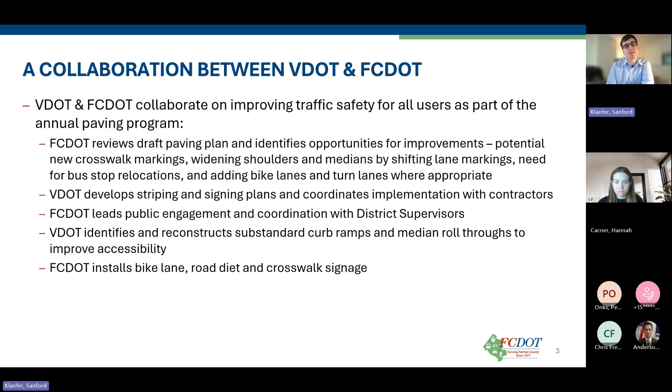So we're doing things a little bit differently this year than we've done in the past. Typically, we've held these public meetings about the proposed striping modifications in the spring, but this year we're going to be hosting those meetings in the fall instead, and that gives us and VDOT a little more time to design the new pavement markings. All of the roadways that we're going to be talking about tonight appear on VDOT's draft repaving list, but they won't finalize that list until this coming spring, and they will do the repaving next year.

So a couple of notes before I get into the proposed modifications. All of our proposed crosswalks are subject to VDOT approval. All roadways with proposed striping modifications appear on VDOT's draft repaving list. VDOT will publish their final repaving list in April 2026 and may choose to defer the repaving of any of these roads. For roadways that don't end up on the final repaving list for 2026, any proposed crosswalks or other marking changes will also be deferred until that road is repaved.

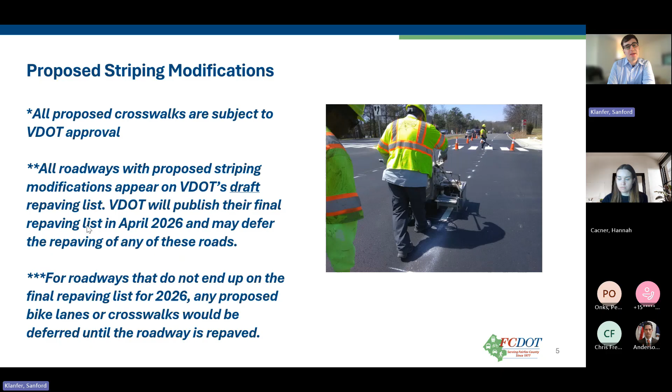So, as I mentioned, we're going to be talking about some crosswalk enhancements tonight. We, FCDOT, study pedestrian crossing locations without crosswalk markings to determine if the crossing meets VDOT warrants for marked crosswalks, and if minor parking restrictions are needed to improve the safety at those intersections. We also, as part of this, will sometimes have to upgrade existing curb ramps to meet ADA standards. And VDOT will upgrade existing crosswalk striping from standard to high visibility, like you can see in this photo here, near schools and near transit stations.

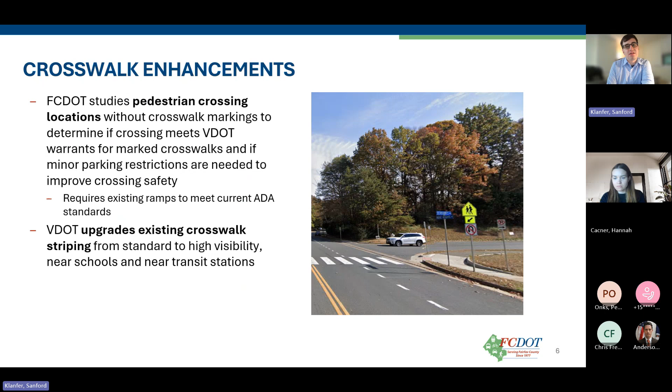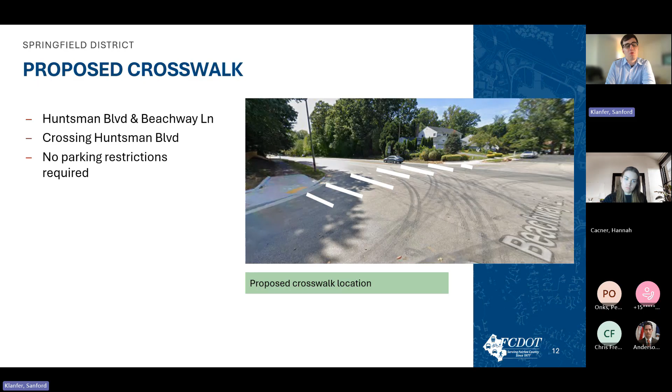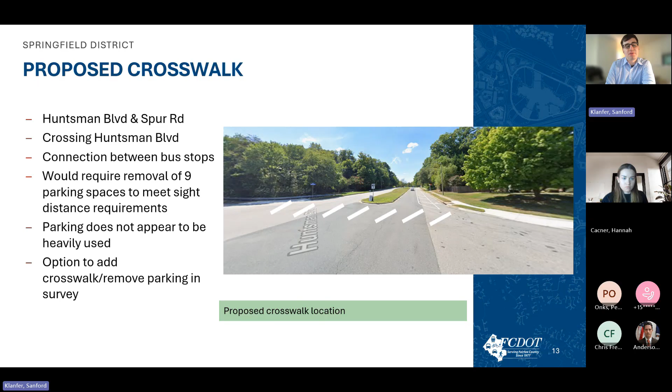Another proposed crosswalk crosses Huntsman Boulevard at Spur Road. This will provide a connection between bus stops and will require removal of 9 parking spaces for sight distance requirements. However, from our investigations, we've found that this parking does not appear to be heavily used.

This diagram shows where the parking would need to be removed for this crosswalk, once again shown in yellow.

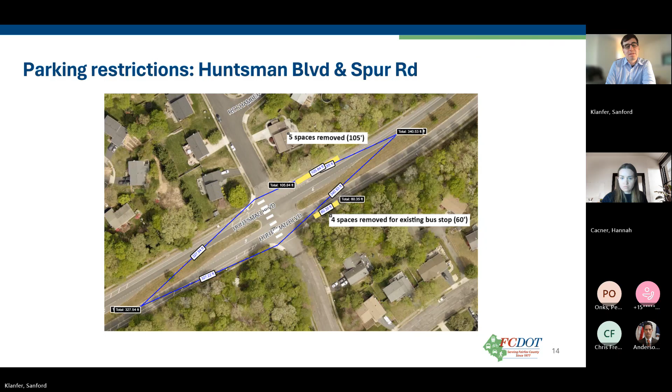This is a proposed crosswalk across Hampton Forest Way, where there is an existing trail crossing that does not have a marked crosswalk. This one has been requested by the local homeowners association, and will require removal of 16 parking spaces to meet sight distance requirements. Once again, here's an illustration of where those parking spaces would be removed.

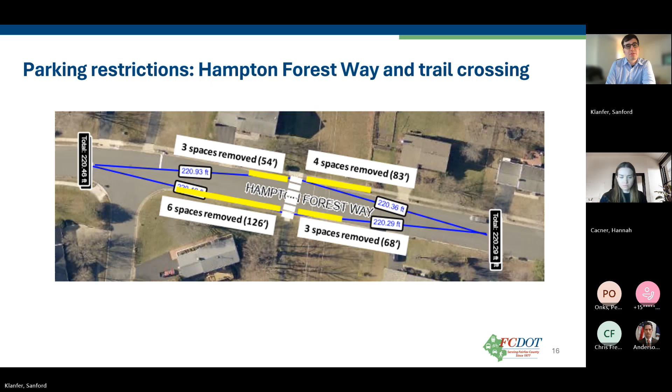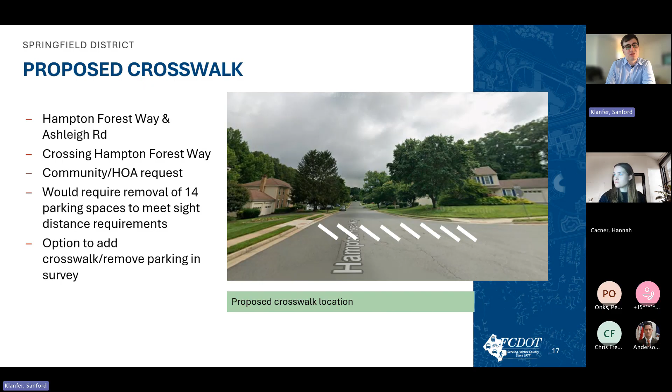This is another proposed crosswalk across Hampton Forest Way, at Ashleigh Road, also requested by the local homeowners association. This one will also require removal of 14 parking spaces for sight distance requirements. Once again, here's a diagram of where those spaces would be removed, shown in yellow.

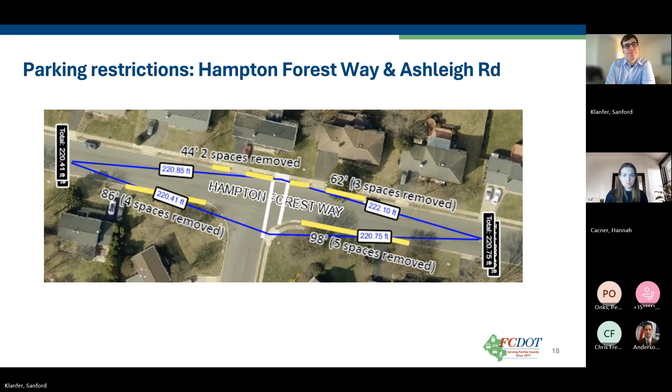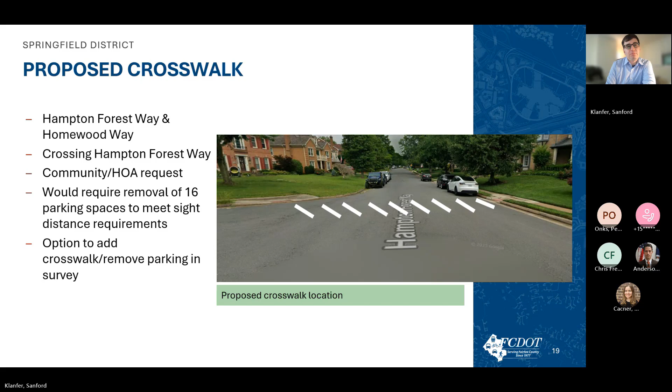This is another crosswalk proposed to cross Hampton Forest Way, this one at Homewood Way. This is also at the request of the local homeowners association, and would require the removal of 16 parking spaces for sight distance requirements. Once again, you can see in yellow where the parking would need to be removed in relation to the crosswalk.

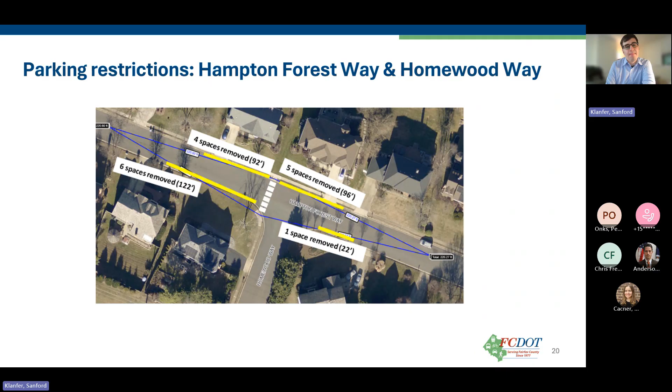As far as feedback is concerned, if you have comments related to pavement or road maintenance, which can be anything from drainage issues to missing signage to broken signals or walkways, that can be submitted to VDOT through their portal at my.vdot.virginia.gov.

If you would like to request a road repair, you can follow the 'I need a road repaired' link on that portal, or you can call 1-800-FOR-ROAD, that is 1-800-367-7623. And you can visit the project webpage for the Fairfax County Restriping Program at www.fairfaxcounty.gov/transportation/2026-paving-and-restriping-program. With that, I'll turn it back over to Hannah.

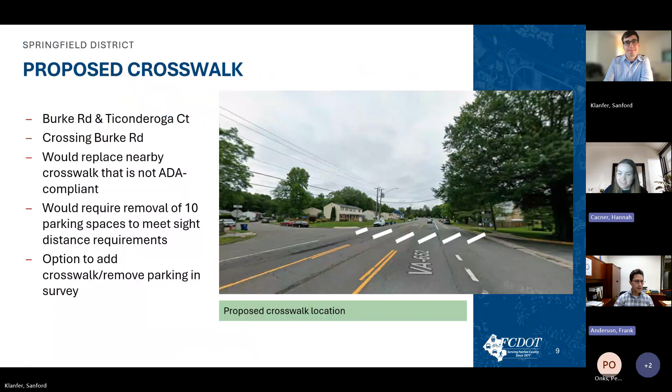Sorry, I went past it. There we go, just saw it there. Yes, thank you. That's the one that shows the parking spaces. Okay, good to know.

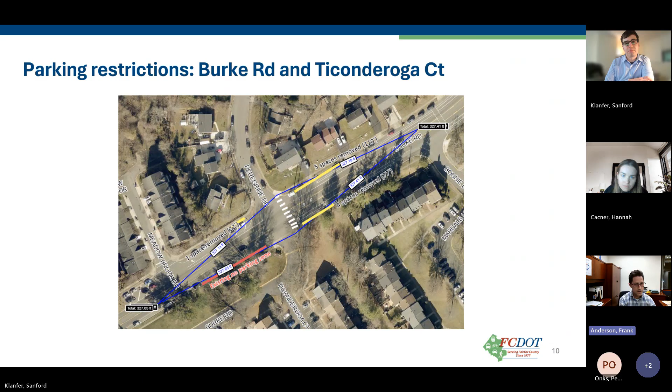So that's 4 spaces on the south side of the road, out of the 10. And at the Cara Place, can you go up to the parking slide for that one? Just 1 space being removed on the right side there. Okay, got it, thanks. Most of them are on the opposite side.

Yeah, I think these are important. That crosswalk that's there now is practically invisible. Just wondered if you all had taken into consideration the Burke Road realignment project that's underway, that's going to be around the bend.

Hey Frank, this is Peyton. I talked with Todd Robson at VDOT and he confirmed the end of the repaving is before the scope of the curve improvement. I'm just thinking about traffic-wise, because you could end up with a lot faster movement. People are typically slowing down to approach the curve now. With the curve gone, I feel like they're going to go faster. I don't have data to back that up, but they're fast enough as it is.

So you would just need lots of signage because people are going to be approaching it even faster than they are now. I wasn't familiar with the project, but thanks for flagging that, and thanks Peyton for looking into that. Adding additional signage is always an option in the future if we need it, but the standard now is to have just the advanced warning signage ahead of the mid-block crossings, so pedestrian crossing ahead signs on either approach would be standard. Excellent, okay, thank you.